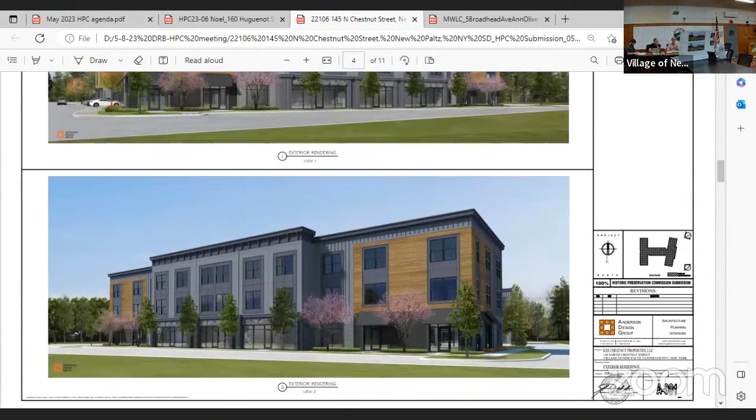Yeah, oh sorry, so this would be A901. This is A901. So the top view here, this is basically along North Chestnut, and then both of these at different angles. So what we're looking at is at the bottom of the building here is our retail space, office/retail area. In the front, we've got 2 stories of residential. Then as you go around the rest of the building, we've got residential on 3 stories. This is the view that you would see. There's a couple of comments though, or events that have happened since I was last here that does affect this view a little bit, which we'll get to in just a moment.

This building is, by definition in the zoning code, 35 feet high. The parapets are taller than that though, so that's why you get the proportions that you see here. We tried a number of things to articulate the building, whether it be with a contemporary take on a historic positioning with the cornice, and also trying to group the two-story element together to give a definition from the residence to the commercial space down below. So the rest of the building, all the way around, looks the same.

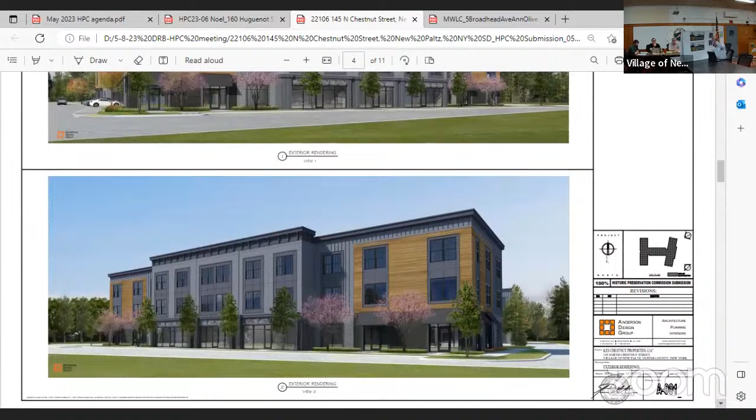So here's a view from the back. Let's say the rail trail is here, so we've got a similar entryway, and of course we're going to have an entry that's just for the residents there. This is 902, from the rear, but we're going to keep the same articulation going all the way around, the HardiePlank wood that wraps each corner with brick down below. We've got a variation of HardiePlank, different treatments as it goes around to really try to break up the mass. And so that's sort of where the presentation was last time.

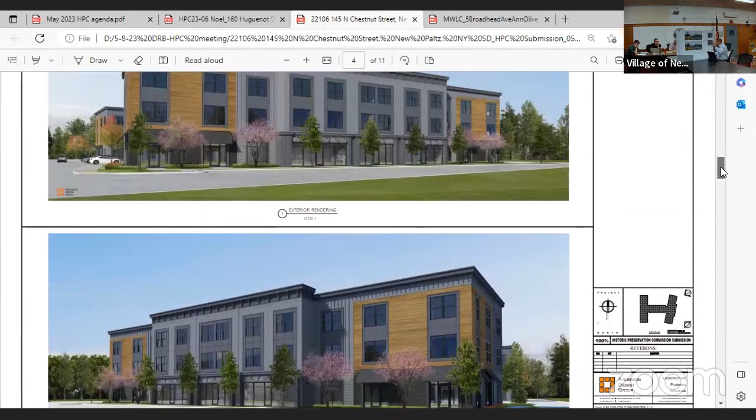We'll give you a couple of things that did come up, one of which we heard back from the DOT. So if you notice here on A901, in the front, we're showing some parking that was there along Route 32. Since we met here, we went back to the planning board. It was discussed having a bike lane that goes along 32 as well, at least on the front of our property.

So that was something we were trying to incorporate. And then this past Friday, we heard back from the DOT. If we're going to put a bike lane in, it needs to be 6 feet wide instead of 5 feet, they said. And they did not want parking in the front, because with 45 mile an hour traffic and someone trying to parallel park, there's likely going to be an issue. So it really does open things up quite a bit for us.

I must have misheard at one point. So there was parking and there won't be because there's a bike lane, or there will be parking and no bike lane? So there was parking and no bike lane. Now there will be a bike lane and no parking.

It's funny, the drawing my counterpart wasn't able to bring today — from our discussion we had actually cut the parking back, removing 2 spaces to get the line of sight we were discussing. That came up at the planning board too. However, after Friday, that's not even an issue anymore, so that will go away. But we will have the bike lane, the sidewalk, and actually room for more landscaping now, although we have to keep the landscaping under a certain height for 15 feet off the curb line per the DOT.

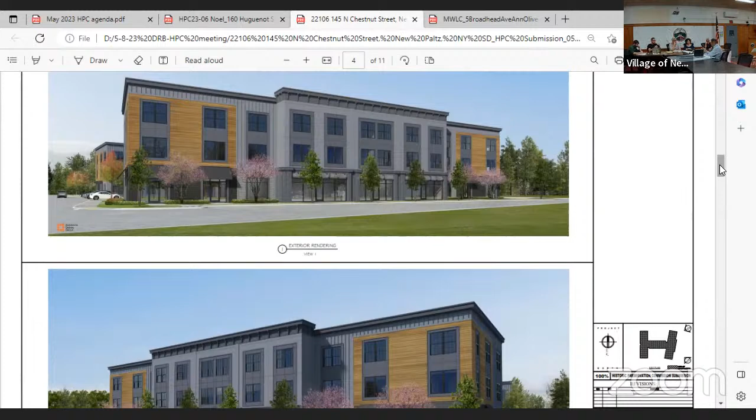Because of the height of the building, fire code requires anything over 30 feet to have full circulation — two means of access for emergency access. So this is designed for a fire truck here, which works out perfectly for loading, because if you can get a fire truck in, you'll get deliveries in as well.

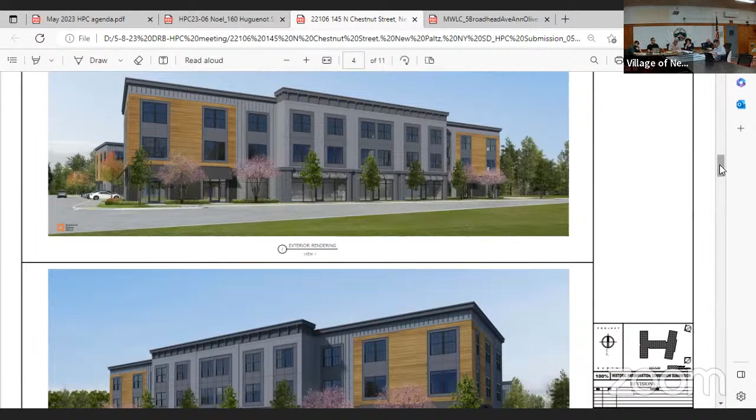One thing though, or a couple things we discussed last time, which I wanted to show you in this view — A300. We discussed venting, right, for the exhaust, whether it's the ranges or the dryers, or also the HVAC system.

So what we did is, after we laid out the different units, we thought it'd be best to place vents above every window. We only need about 2/3 of what we see here, but if we place them above every window, it becomes a feature carried around the entire building, and it fits within the trim that's there. We'd paint it the same color as the trim, and that would become something that catches the eye because it's consistent.

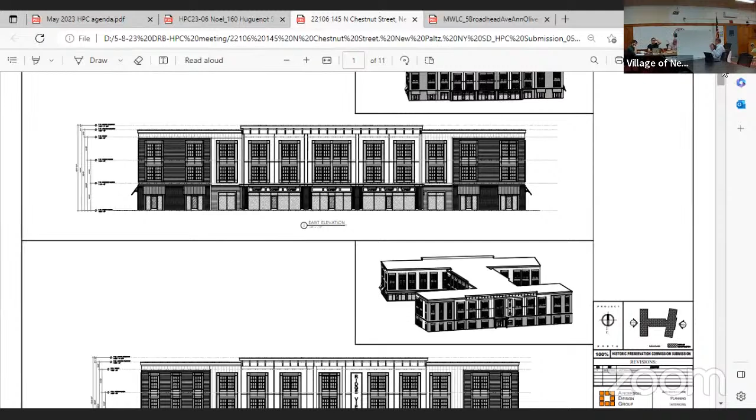And that way it also falls into a flat spot, as opposed to being in the siding or something like that. The other thing we did is we found a sill - I apologize, I wasn't able to get a sample, but a metal sill that's about 1.5 inches bigger than what you'd typically see for the windows. Not the type of sill you'd see on a slip sill that's part of a brick element, but just something to give a little depth at the bottom of each of the windows, which we're trying to represent there.

And Jason, that would be a total of 1.5 inches off the plane of the window, or would that be an additional 1.5 inches over something? No, it's going to come off probably about 1 inch, but I'm trying to get depth this way so that it's visible from the street.

Right, exactly. So this is all paneling around the windows to create that appearance of a 2-story. What we're doing is back banding that trim so that around the entire piece, we're coming off 1.5 inches of a back band that goes around all of that trim panel. If you look at historic trim, you've got a flat piece, then another piece around the outside that sticks off a bit more - that's the back band we're trying to put around this entire unit. We'll also have the sill that sticks out at that same depth.

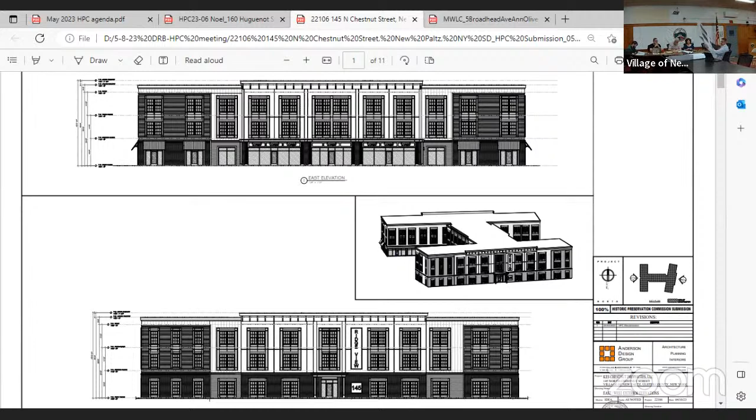The last thing I had on the list that we discussed was VP 1, but this is the new drawing. So you asked if I could zoom in a little bit more, so - now again, it makes it a little bit out of proportion because I just zoomed in, but that's sort of what you see now here.

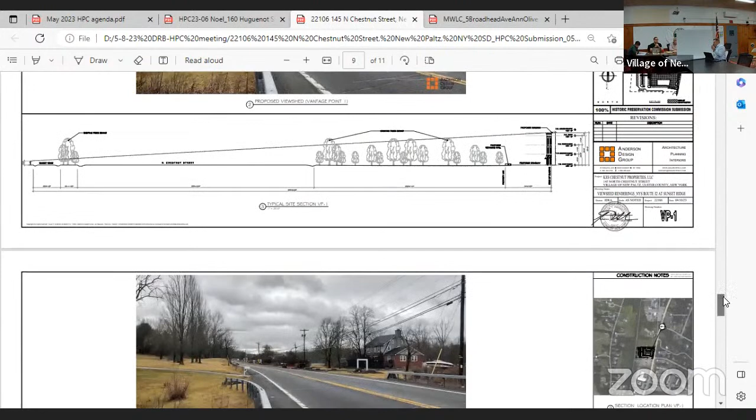That is, to me, really helpful - you can see it in its relationship, you see the utility poles. To me that is super helpful, even that, to just kind of get a sense of scale, because the upper one just kind of disappears into the - yeah, that's the original photo.

On the back of one of these is the previous one that we had. So I think we tried to address additional plantings, also discussed possible trees in the corners, the vehicles in the front, the louvers zooming in and showing the additional venting - so we're able to accomplish that all together.

And the opportunity for outdoor space with benches - that, of course, has not yet been developed. However, now that we're losing that parking, we gain... I think it's a nice opportunity to create a kind of human space. I think that's going to be a much better space.

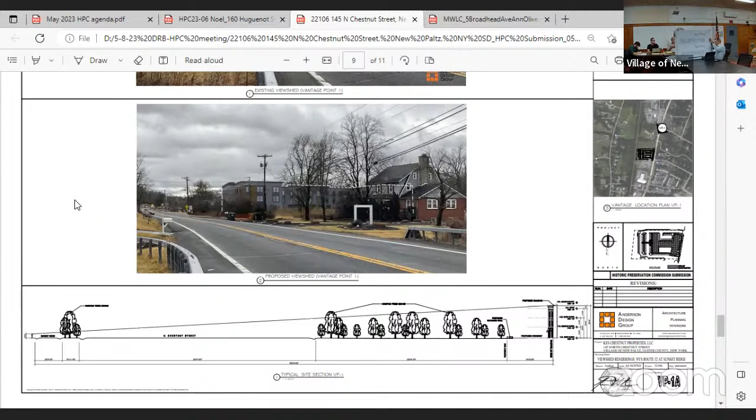So this is the site section that we did. This is Huguenot Street, VP3. This is the rail trail stream, and the property line is here, and then our paving is here. So this is that location where I think the headlights would be, this section is taken right here.

Okay, right across, there's us, there's Carlo. Yeah, there's really not a lot of variation here, that's pretty flat. So, yeah, this is the closest house.

I think I'm seeing from the aerial shot that is the Doris house, pretty much directly west. No, Doris House is south of that by quite a bit. Oh, okay, then somebody else has a backyard pool in here. Yeah, you're right, it's up beyond actually, it's closer to the Huguenot Street Farm.

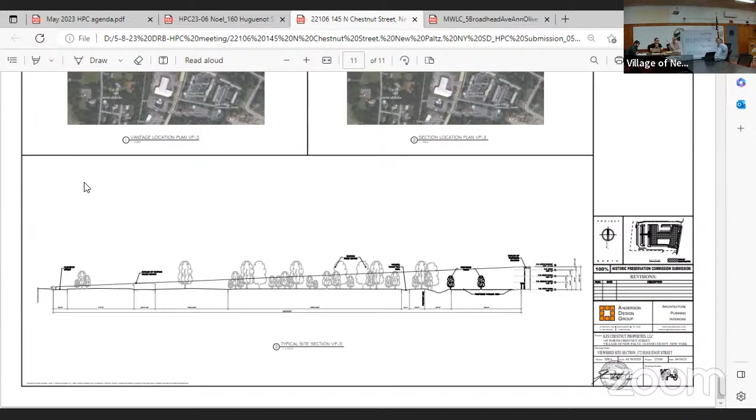Oh, that's good. You have a question? Yeah, again, I'm done. I'm talking about the gray colors. Yes.

And things with this standing seam and such. What's the thoughts? I sort of, as I said last time, it sort of grew on me, the color. But I was wondering if there was any discussion about a more earth tone color, like a beige color, or something that has some green in it.

We'll definitely bring it back to them. One of the benefits here that we were hoping to go with is using the antique dark brick, contrasting it with the wood earth tone, and then the rest of the building in contrast to that. We felt like these buildings, probably to save money financially, keep everything looking the same, so we tried to come up with a way to break that monotony up a bit.

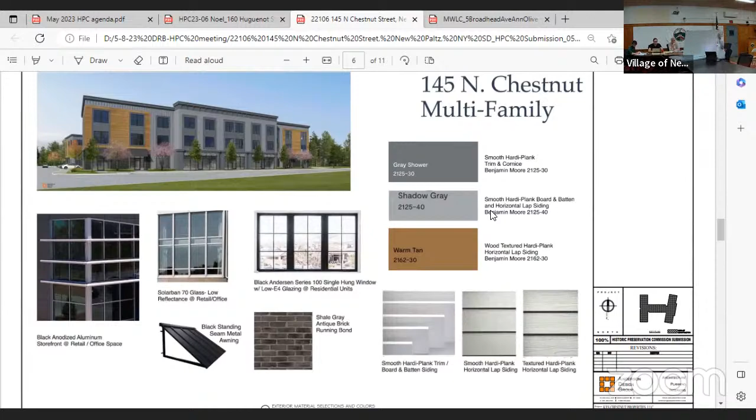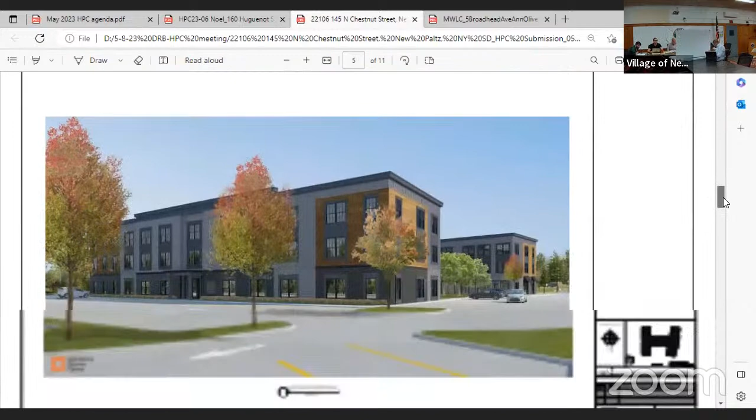Yeah, I don't know that it's so hard to compare, but there's definitely more interest, I think, with events. Want to look at A302? Oh yeah, it's a sort of an aerial view.

And turning those into panels. So then that whole entire base would be panel at the front part. Yeah, I like this - these just aren't working. Yeah, I think that makes sense.

And I guess also just speaking to the actual pilaster design there. I feel like, I don't know, because those are shown as what, fluted? They have their flutes. In this location, yes.

Yeah, I guess, I don't know, Mia, maybe if they're just flat with a recessed panel or something. I feel like the flutes... I mean, I don't have an issue with it, but when I think of fluted pilasters, it's very traditional, very Greco-Roman. I don't know if you want that - I feel like maybe for the pilasters more of an industrial leaning pilaster instead of something so traditional.

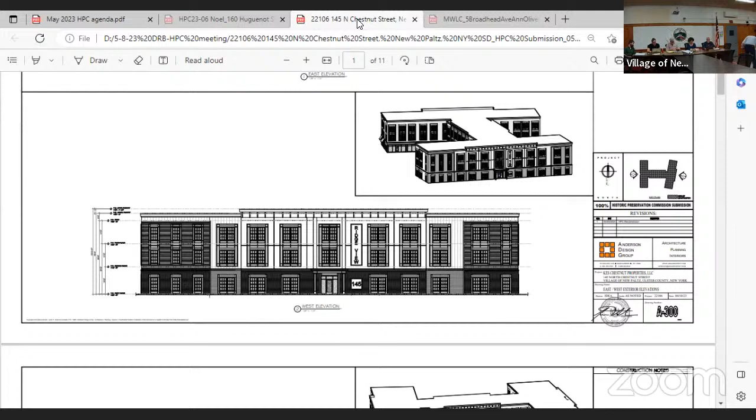That's true, I remember. Thank you all very much. Right, thank you very much, appreciate it. Had a good trip to San Francisco. Yes, between now and then. Nice, 40,000 architects getting together. Exactly, there must be a punchline in there somewhere. I remember reading an article in the Chicago Tribune when my profession was having a conference in Chicago, and they quoted somebody saying, 'They're nice people, but they don't tip very well.' Like we're English professors, what do you expect?

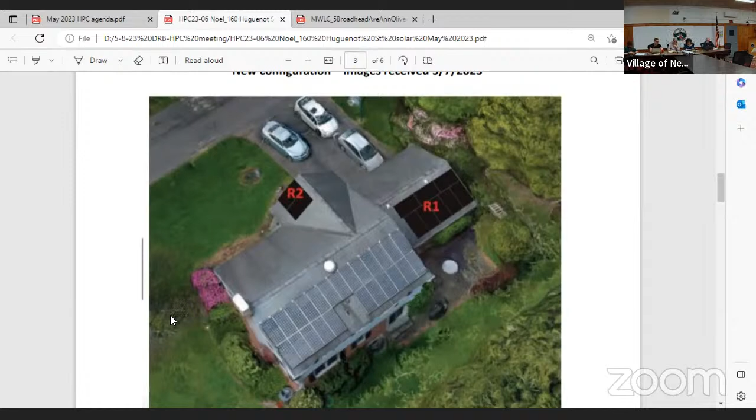It's also a win for the - I think that we probably want to go to another one sheet guide and get some names, figure out what the terms are for the monochromatic panels. Maybe after the fact we can talk to Jeff and get some photos. Great, wonderful news. So that passed 5-0.